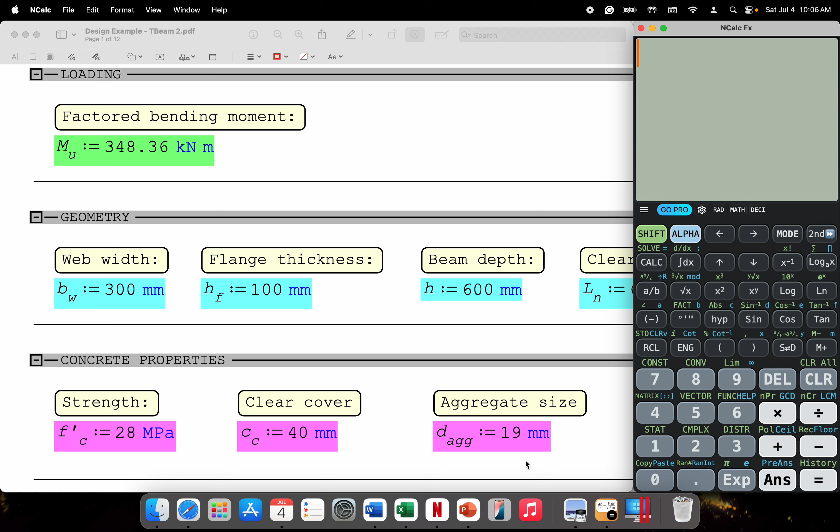So for this time, we're going to design a reinforced concrete T-beam. So we have here our design example.

Given the factored bending moment of 348.36, here's the geometry: the web width is 300 millimeters, the flange thickness is 100 millimeters, the beam depth is 600, the clear length is 6.10 meters, and the clear spacing of the beam webs is 3 meters.

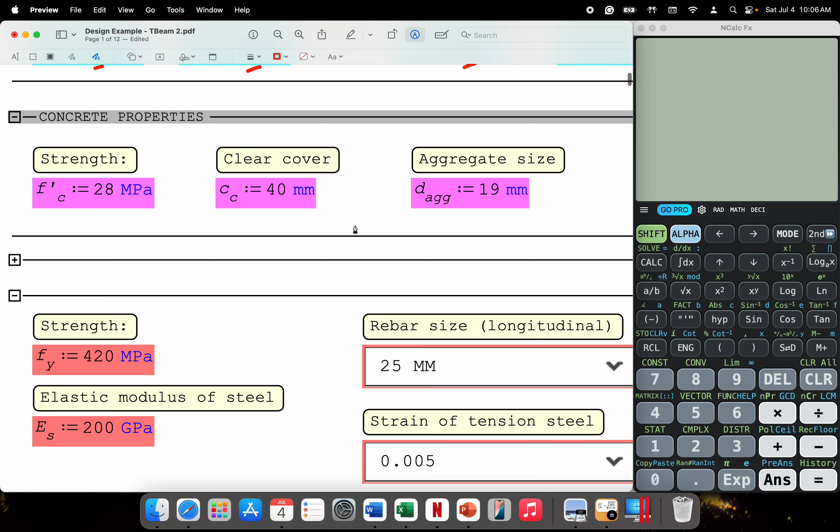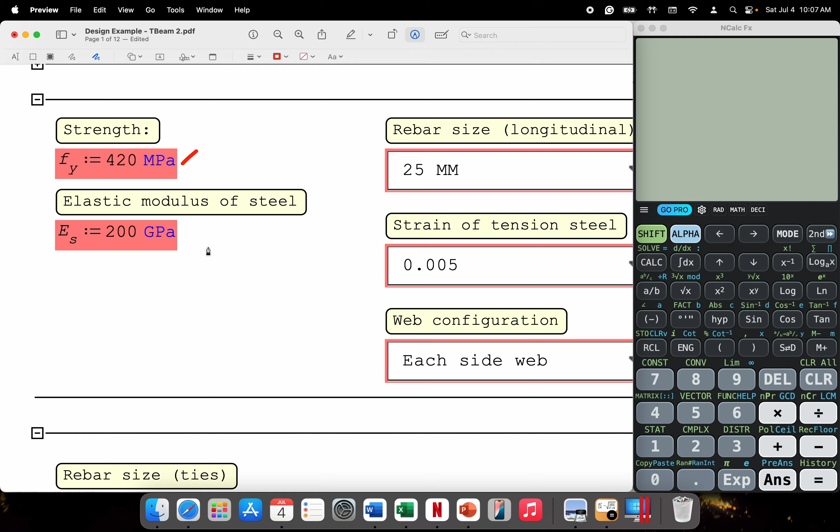Here are the concrete properties: FC prime is 28 megapascal, clear concrete cover is 40 millimeters, and aggregate size is 19 millimeters. For steel reinforcement properties, the yield strength is 420 megapascal, the elastic modulus of steel is 200 gigapascal, the rebar size for longitudinal bars is 25 millimeters diameter, and the strain of our tension steel is 0.005.

This is for design. For the assumed layer of rebars, we assume a single layer. The beam configuration is simply supported, and the web configuration has a web on each side.

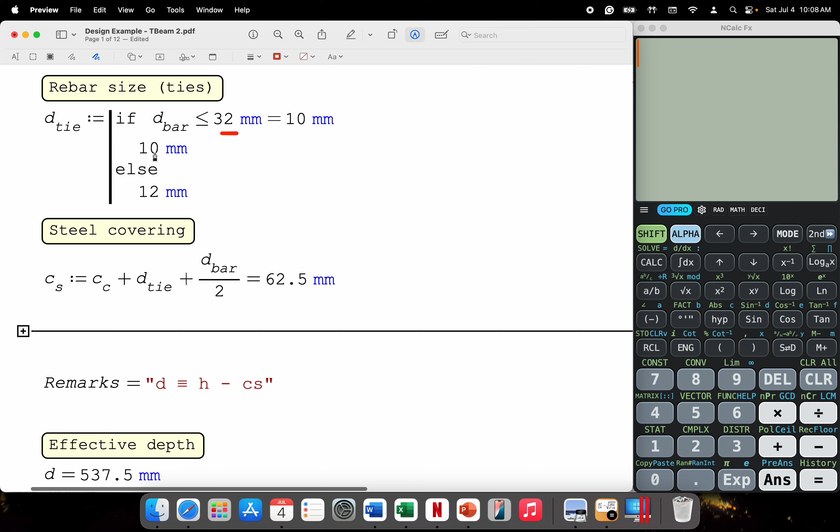So here's the design calculation. First, we have to determine the size of our stirrups. Since our bar diameter is 25 millimeters, which is less than 32 millimeters, the diameter of our stirrups is 10 millimeters. After that is the steel covering.

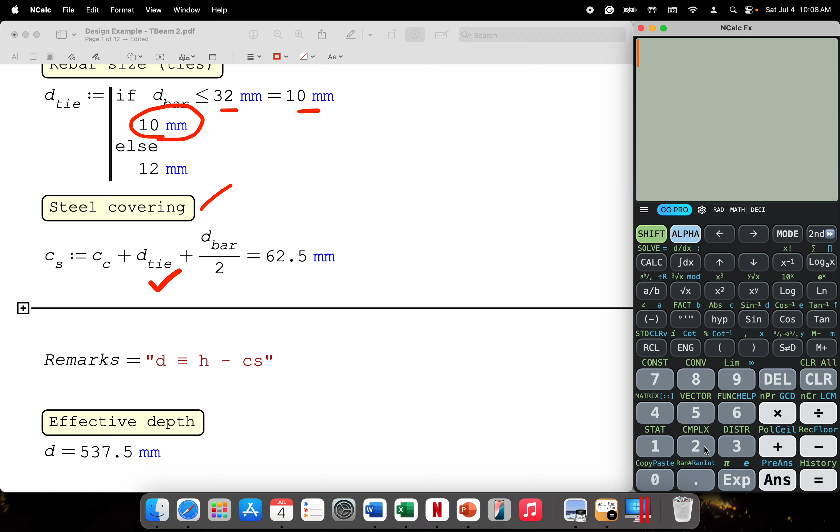Considering that we have a single layer of steel reinforcement, this is the equation to determine the steel covering: C sub C, the clear concrete cover, plus the diameter of ties which is 10, plus the bar diameter of 25 divided by 2. So we get a value of 62.5.

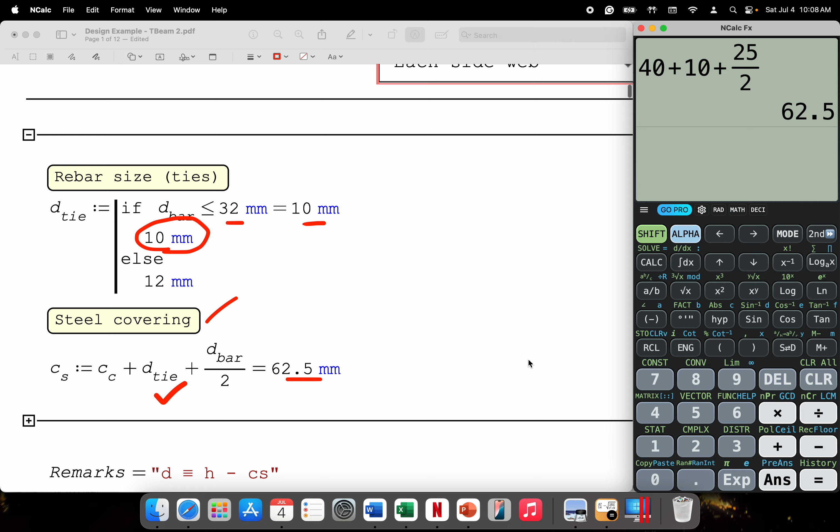After that, we determine the effective depth. Considering a single layer of steel reinforcement, it's just H minus the steel covering. Our H based on the problem is taken as 600, so we subtract the steel covering of 62.5.

So we get a value of 537.5. After this is the yield strain of our tension steel, which is just Fy over the elastic modulus of steel: 420 divided by 200,000, giving us 0.0021.

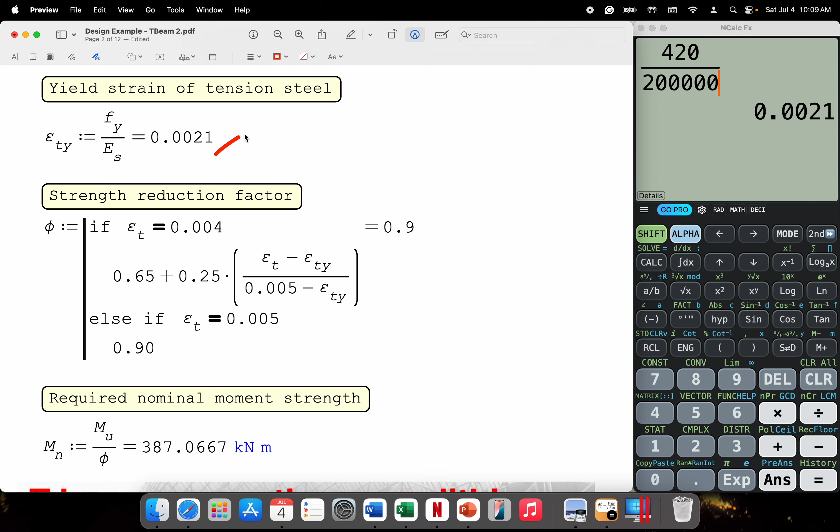After this is the strength reduction factor. Considering that the strain based on our given is 0.005, the strength reduction factor for designing our beam shall be taken as 0.9.

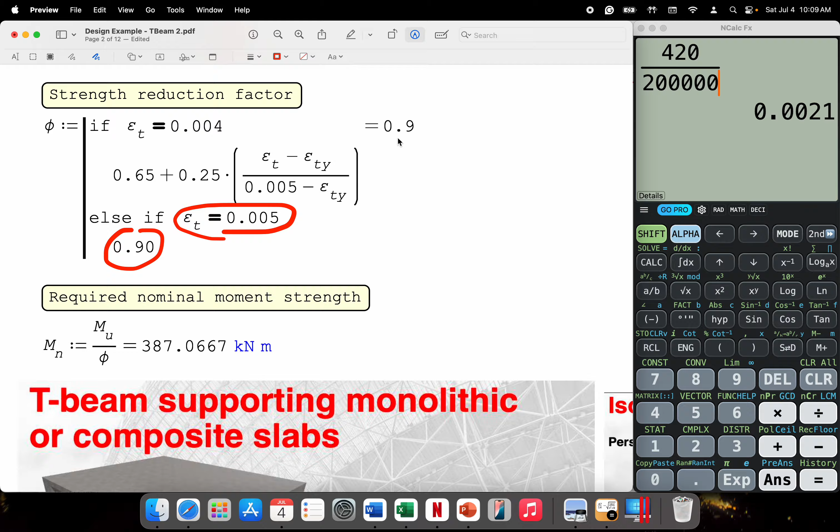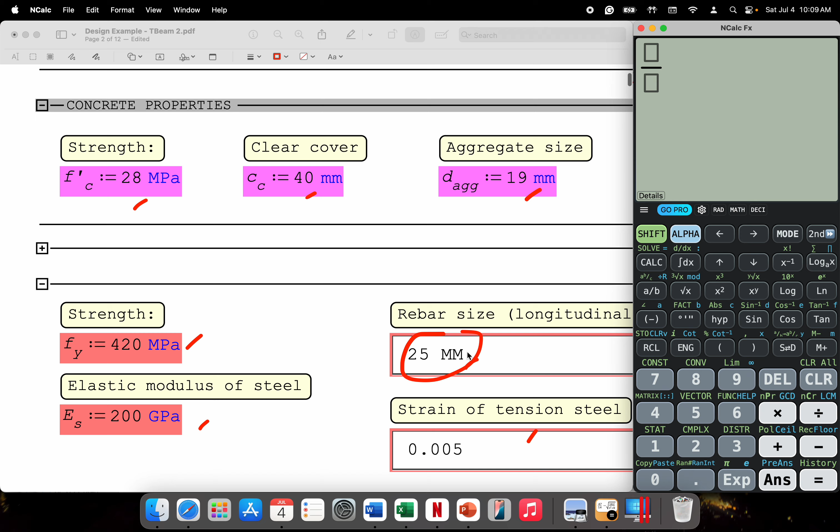After this is the required nominal moment strength. Since the factored moment is given, we just divide it by our phi of 0.9. So our factored moment is 348.36, divide this by 0.9, and we get 387.07.

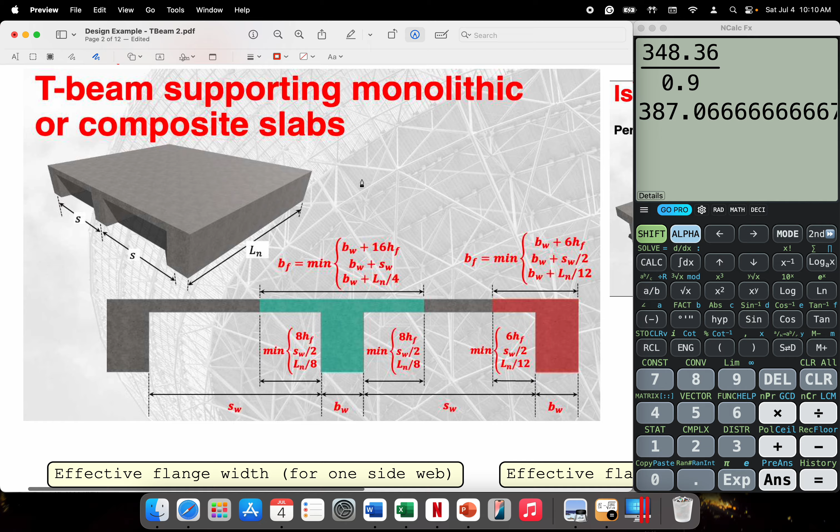So just a short lecture or review. Talking about T-beams, we have two types: the monolithic or composite slabs, where the T-beam supports a monolithic or composite slab as shown in this figure, and the isolated T-beam. For our design example here, we considered a T-beam supporting a monolithic or composite slab.

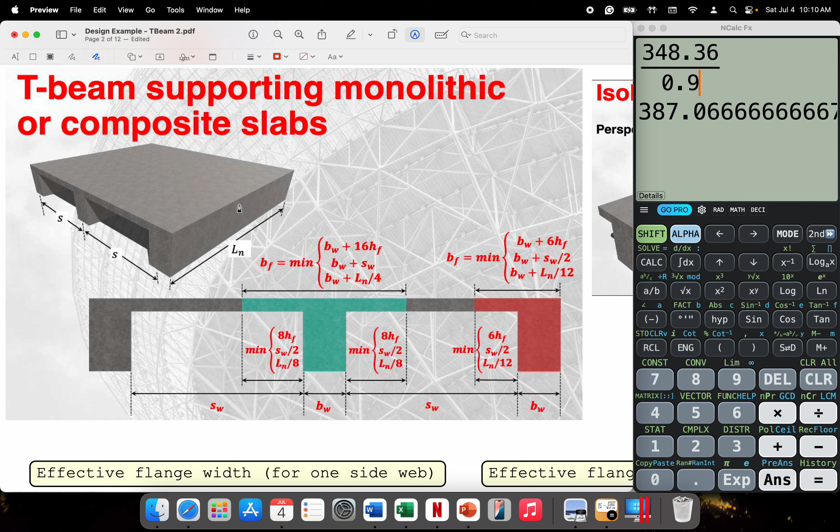This means the rectangular beam and the slabs are poured together, so we can analyze our beam here as a T-beam. It's also stated in the problem that there's a web on each side, so this is what we need to consider.

So first we need to determine is solving for our effective flange width. We have two cases: one web on one side, and two webs on both sides. If we consider one web on one side, this is the shape of our T-beam.

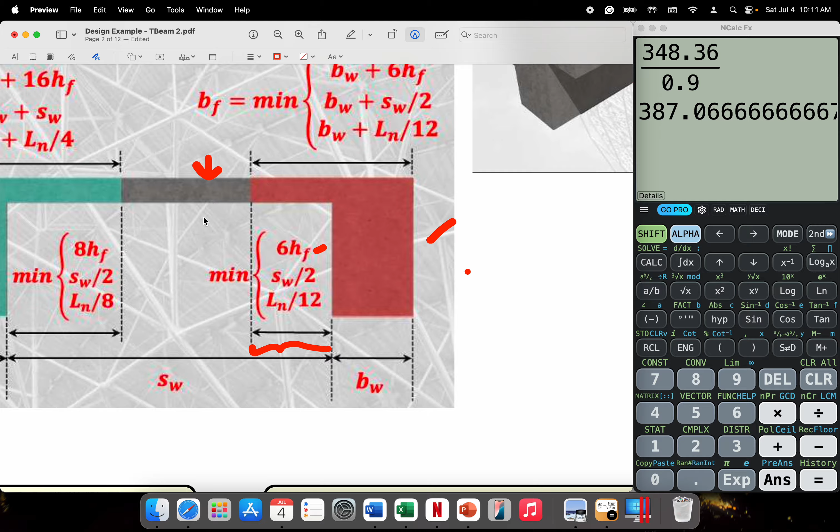Based on the NSCP, the clear dimension from the edge of our beam shall be taken as the minimum value among these three equations: 6 times HF, where HF is the thickness of our flange or slab, and SW all over 2, where SW is the clear dimension between the beam webs.

Okay, kung i-consider natin yung merong web on each side, ito naman yung ating equation. So yung dimension dito from the edge ng ating beam papunta dito, ito yung minimum ng tatlong equation: 8 times HF, SW all over 2, tsaka LN all over 8. So para makuha natin yung overall na dimension ng ating effective na

flange width, we're going to add yung BW tsaka 2 times ng dalawang mga clear dimensions dito. So meron tayong equation na BW plus 16 times HF, kasi yung 8 we multiply it by 2, naging 16. Next naman is BW plus SW, kasi SW all over 2 plus SW all over 2, that is taken to be SW. Then lastly, BW plus Ln all over 8 plus Ln all over 8, that is equivalent to Ln all over 4.

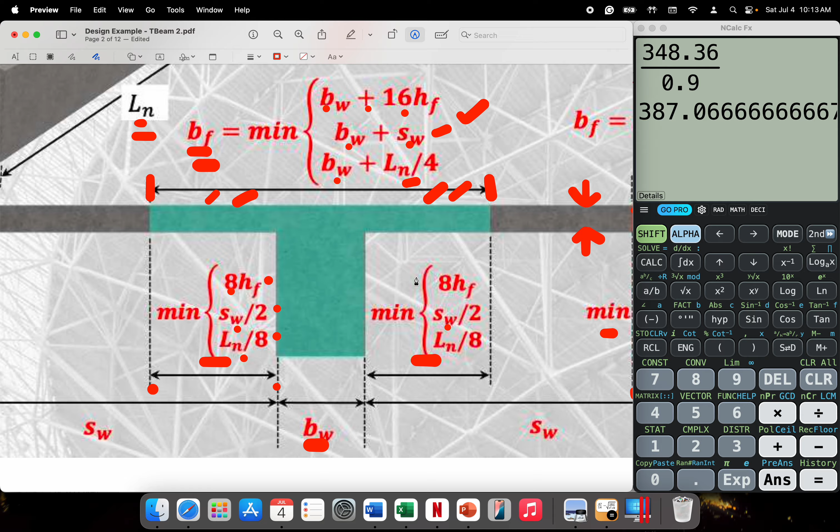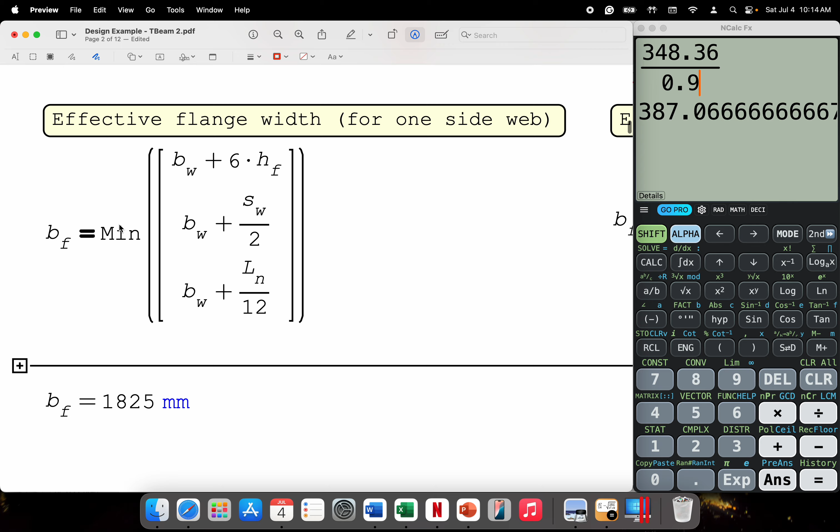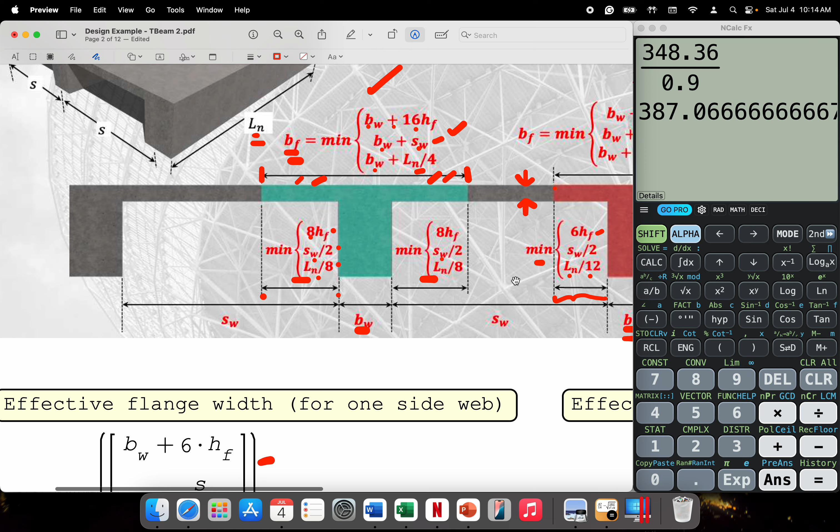So effective flange width for one side web, ito yung ating equation. This is the minimum among these three equations. However, na-state sa problem na yung condition is for each side web, meaning merong web dito sa kabila, tsaka merong web dito sa kabila. Meaning, itong shape na ito yung ating i-consider.

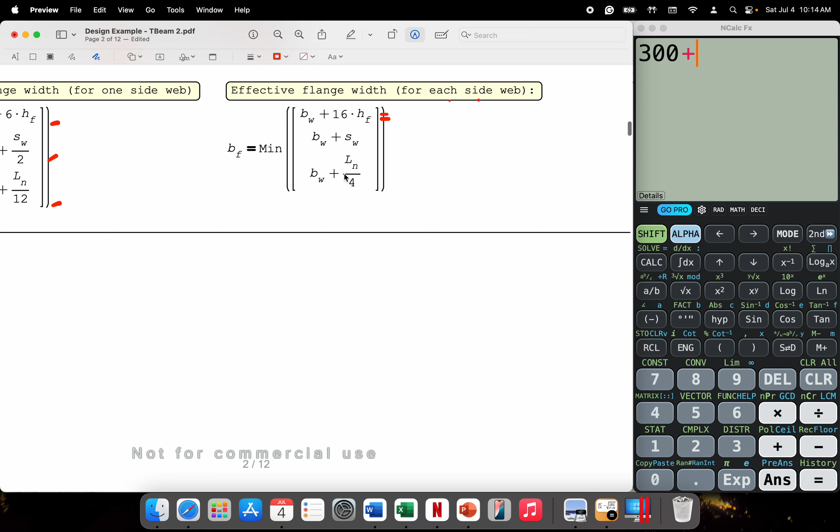So solve natin yung una equation: BW plus 16HF. Kung balikan natin, yung BW is taken to be 300 plus yung HF na 100, 16 times 100. So this is equivalent to 1,900.

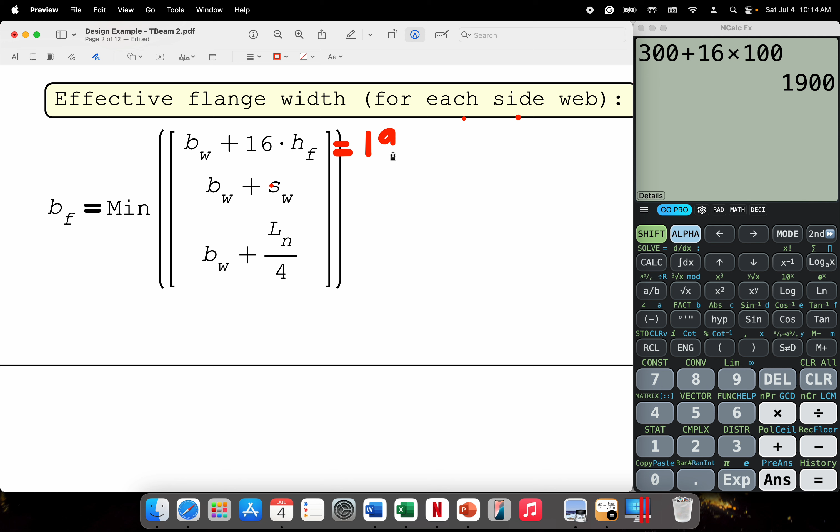Next naman is BW plus SW. Kung check natin yung SW, based sa problem, that is equivalent to 3 meters. But we still have to convert this to millimeters kasi naka-meter yung unit. So 3 times 1,000, we'll get 3,300.

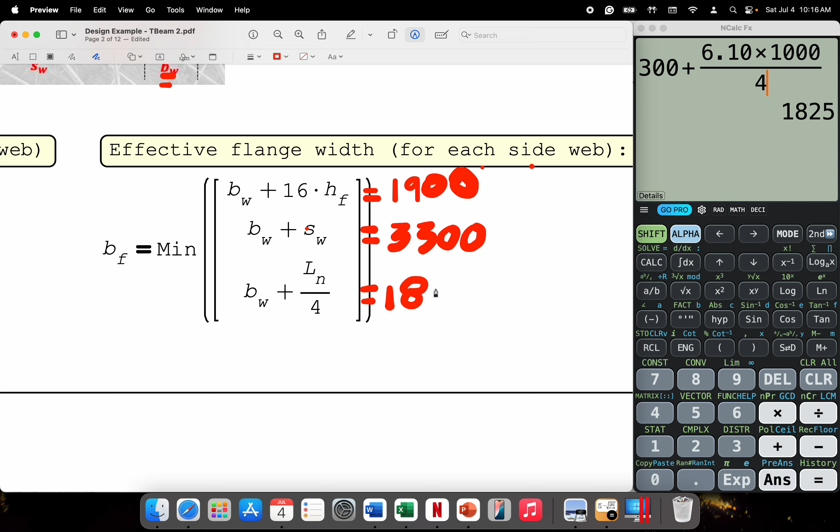Then lastly is BW plus LN all over 4. Yung LN based sa problem is 6.10, then mag-times lang tayo ng 1,000 para ma-convert sa millimeters. This is LN all over 4, so we have 1,825. So yung effective flange width natin na i-consider sa ating design is 1,825 millimeters.

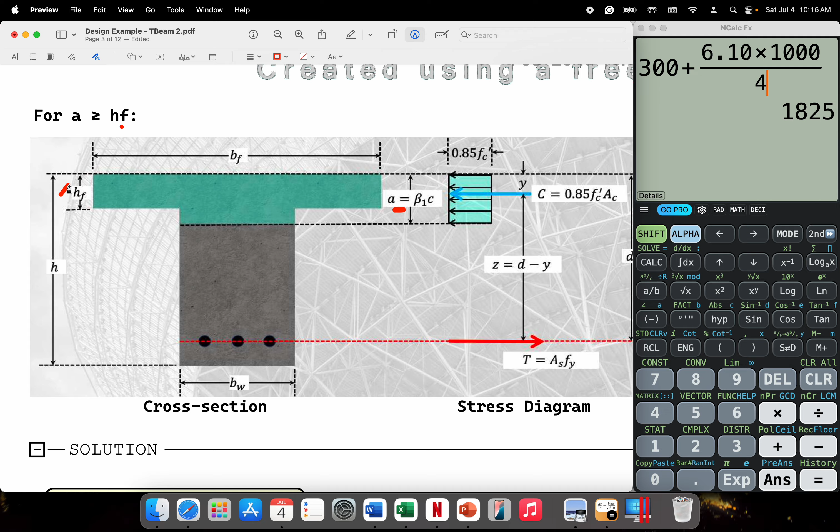Next na i-consider natin is we have to solve or analyze if yung A natin ay greater than or less than sa HF, or flange na depth na thickness. Kasi ito yung magiging cross-section natin sakali na yung A, ito yung A natin, ay lampas sa thickness ng ating flange. So in short, itong shaded na area dito, ito na ngayon yung magiging area ng ating concrete block.

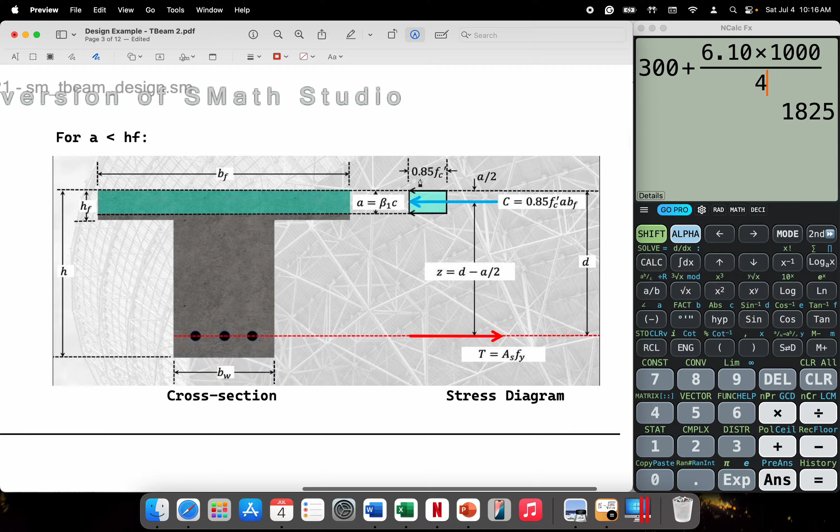Sakali naman na yung A natin is less than H sub F, ito naman yung magiging cross-section natin tsaka stress diagram. As you can see here, yung shaded na region dito, ito yung area ng ating compression block.

So for our solution, first and foremost, we have to determine muna yung trial na moment arm. Based dito, meron tayong mga suggested na equations para ma-determine yung moment arm. In short, we're going to conduct here an iterative na process hanggang sa makuha natin yung magiging value ng ating required na steel area. Yung Z dito, as you can see sa figure, this is the moment arm, or the distance between the tensile force ng steel reinforcement tsaka yung compressive force ng ating compression block stress.

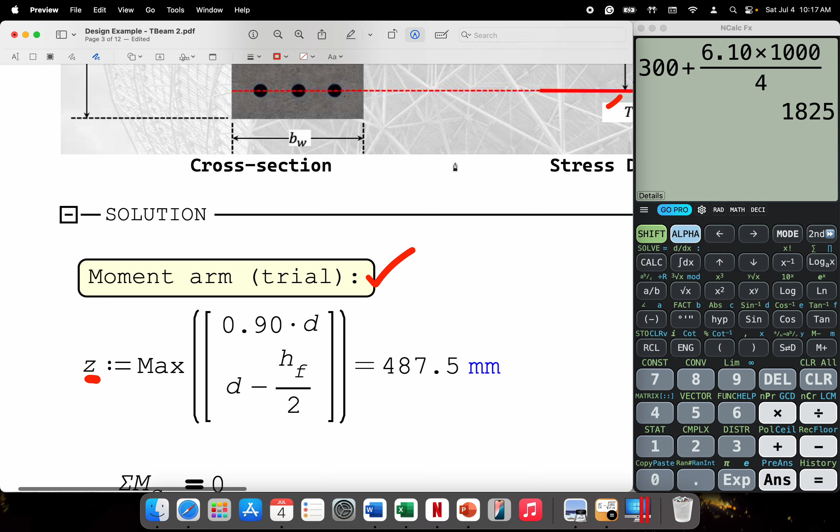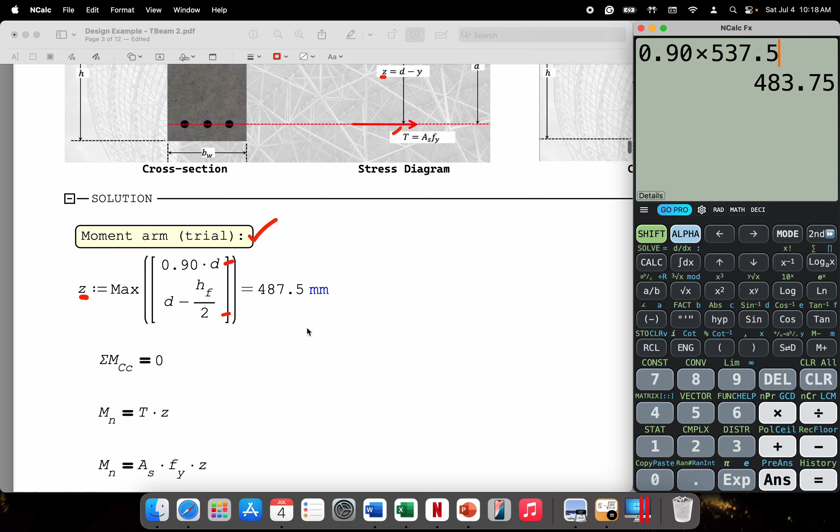So by trial and error, this is equivalent to the maximum value between these two equations. Kung i-solve natin yung 0.9 or 90% ng D, yung value ng D natin is effective depth, 537.5. This is equivalent to 483.75.

Then itong dalawang equation naman is D minus yung HF all over 2, 100 divided by 2, we have 487.5. So, state dito sa problem that the maximum value between these two equations ang mag-govern. So that's why yung 487.5 yung magiging trial na moment arm natin.

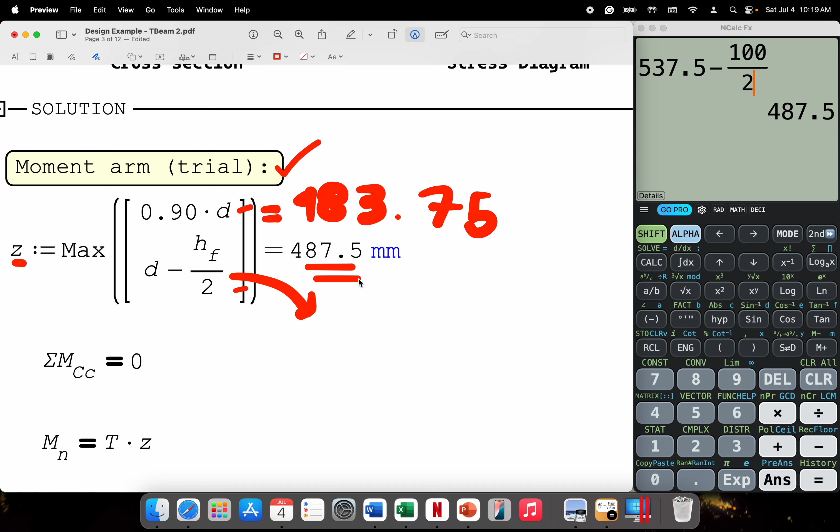After that, we're going to sum up our moment dito sa location or centroid ng ating compression block na force. So in short, dito tayo mag-moment, kung saan man yung magiging centroid ng ating area ng ating compression block.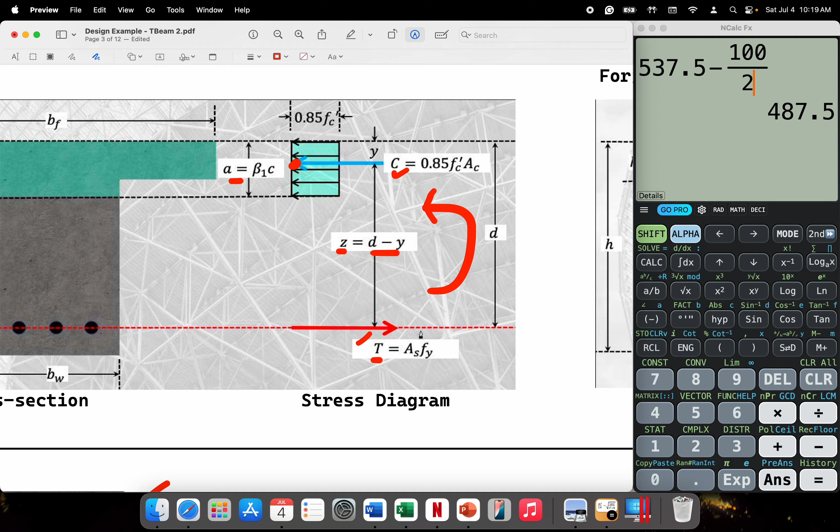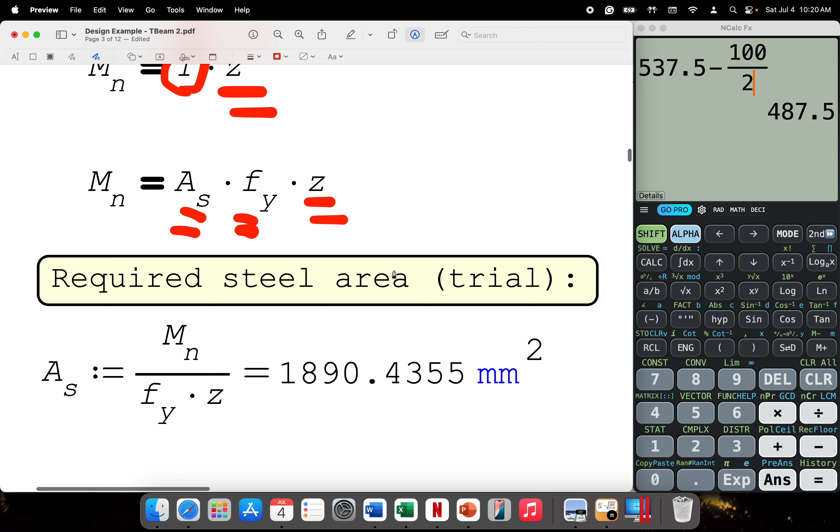So therefore, yung nominal moment natin, Mn, will now be equivalent to T times yung ating moment arm na D minus Y, Z. Yung T natin, if we're going to substitute the equation, that is equivalent to AS times yung ating Fy times yung ating moment arm na Z. After that, we're going to divide both sides of our equation here by Fyz para makalkula natin yung required na steel area, yung trial na required steel area.

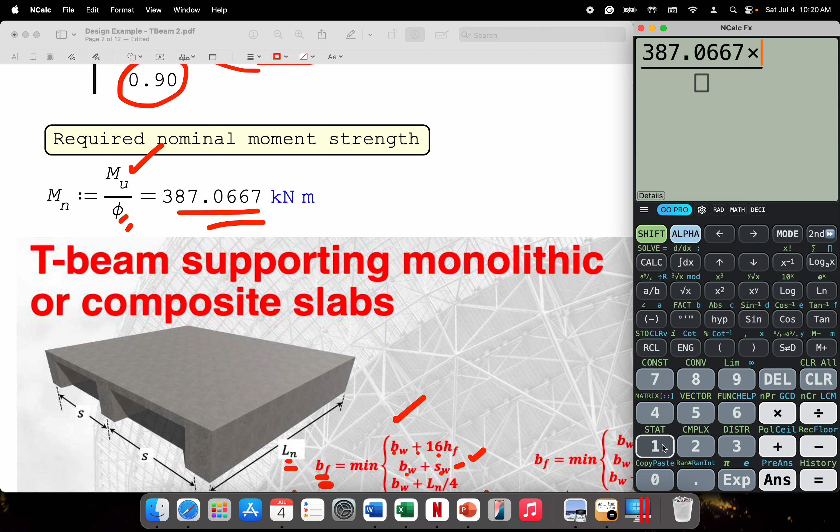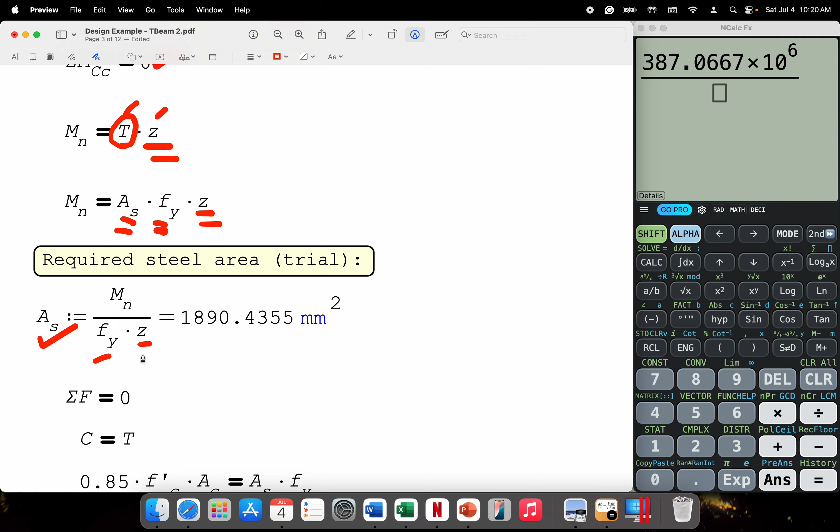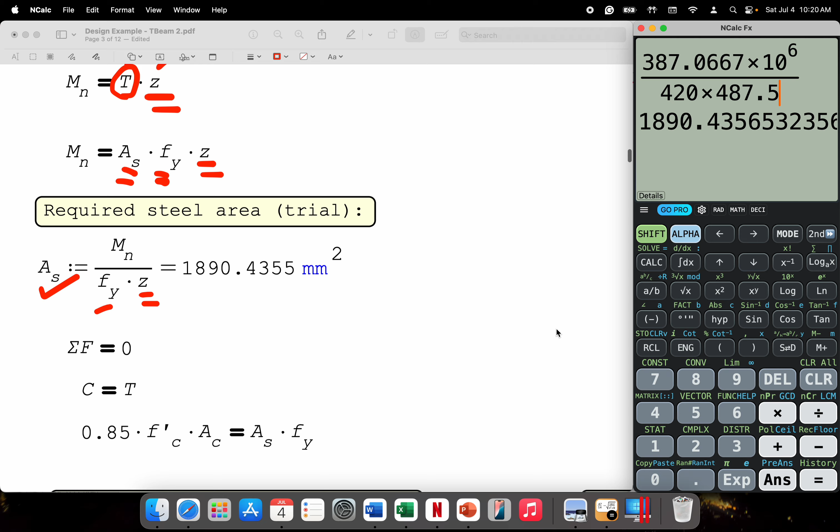So yung ating nominal moment na na-solve kanina is equivalent to 387.0667. Mag-times 10 tayo to the power of 6 para ma-convert ito sa Newton times millimeter. Then we're going to divide this by Fy times yung trial na moment arm na Z. Yung Fy natin, if I'm not mistaken, that is 420, times yung Z, yung trial na moment arm na 487.5. So yung makalkula natin is 1,890.4355.

After that, we're going to sum up our forces to be equivalent to 0, such that yung C will now be equivalent to T. We're going to base it here sa ating diagram. If we're going to sum up our forces, yung tensile force T natin will be equivalent to compressive force ng ating compression block stress na C. So therefore, AS times Fy will now be equivalent to 0.85 Fc prime times yung area ng ating compression block.

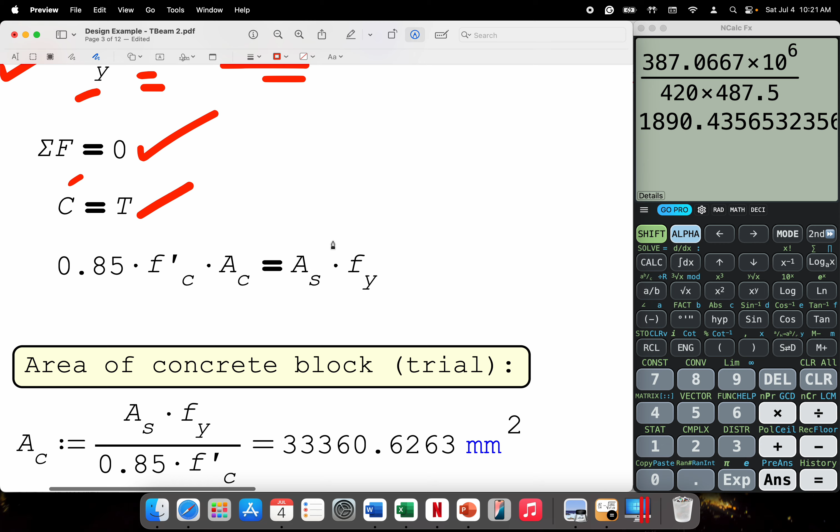So AS times Fy is equivalent to 0.85 Fc prime times AC. If we divide both sides of our equation by 0.85 Fc prime, the trial area of our concrete block will now be equivalent to AS times Fy all over 0.85 times our Fc prime.

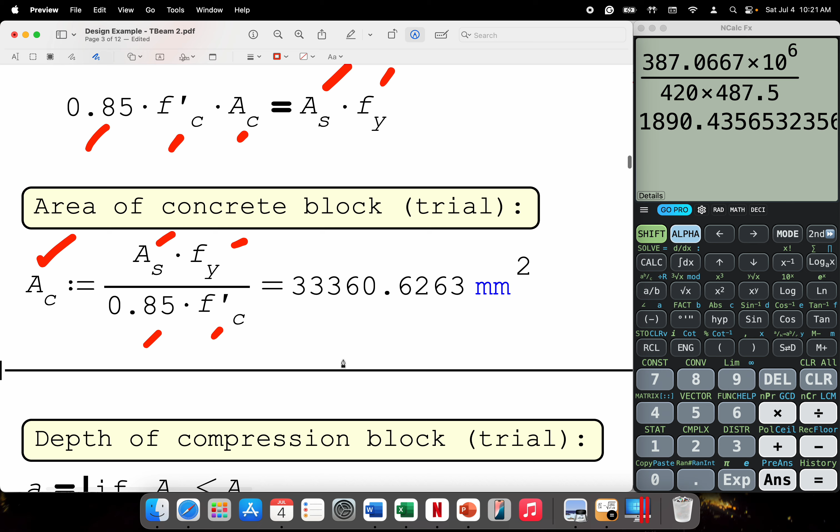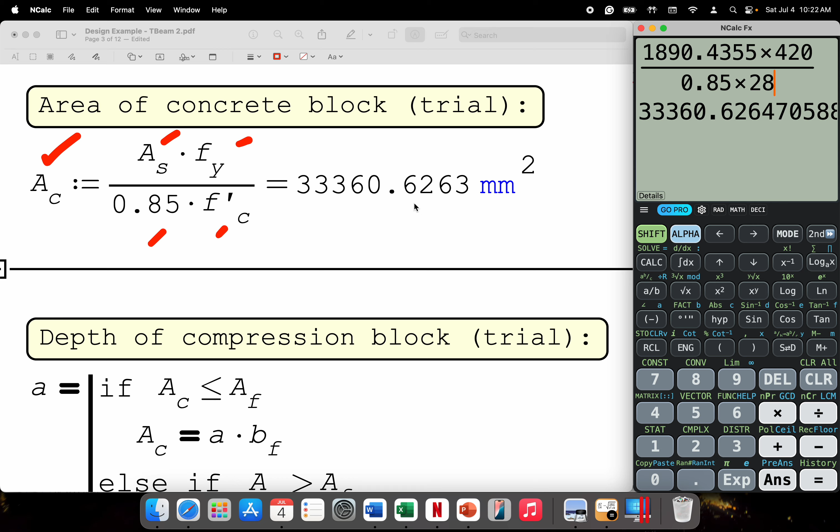So the AS is equivalent to 1890.4355 times the Fy of 420, divided by 0.85 times our Fc prime of 28, we will get 33,360.6263 square millimeters.

Since we already have the area of our compression block, let's compare it to the area of our flange. So the area of the flange referred to here is this. Again, the area of the compression block, the A sub C, is this shaded region, for example. Let's compare it to the area of our flange, which is equivalent to BF times our HF.

So in case our A sub C exceeds the area of our flange, meaning this shaded region will be the area of our compression block if we visualize it, meaning our A is greater than our HF.

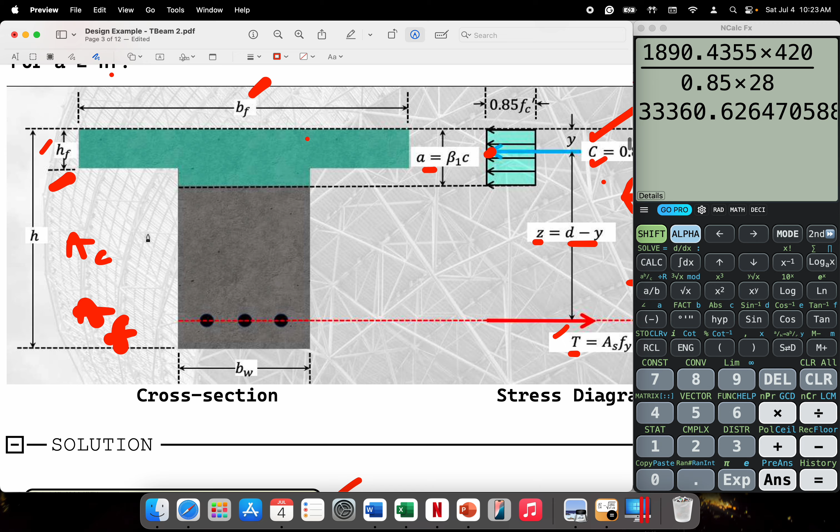But if the area of our compression block, the A sub C, is less than the area of our flange, this illustration will be the result, meaning the A is less than our HF.

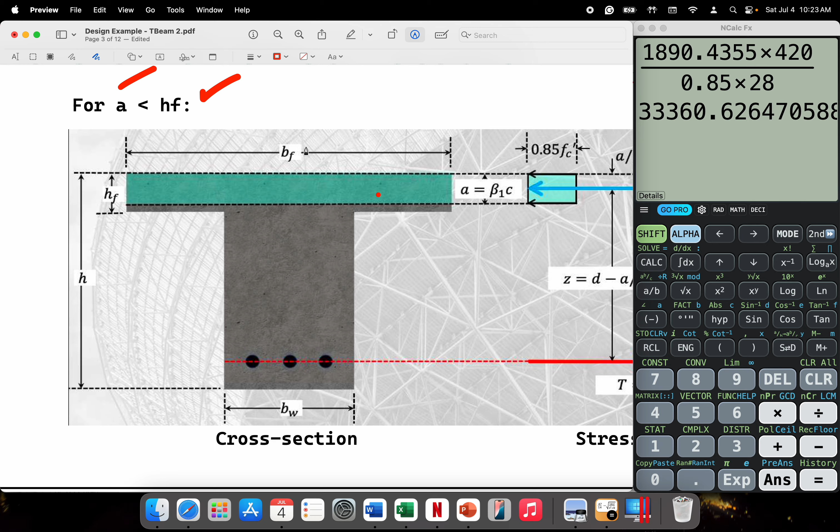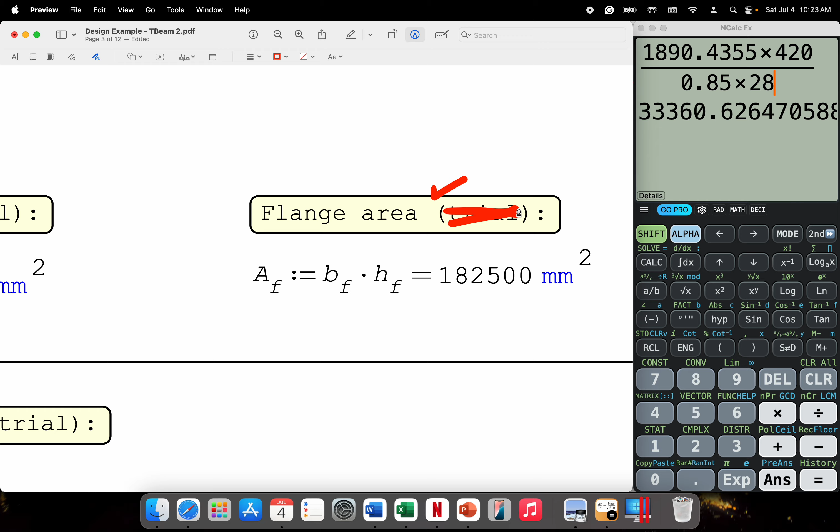So if we're going to compare, let's first solve the area of our flange. This is not trial, by the way. Our flange area is BF times HF.

So the BF we solved earlier is equivalent to 1825 times the HF of 100, so we'll get 182,500.

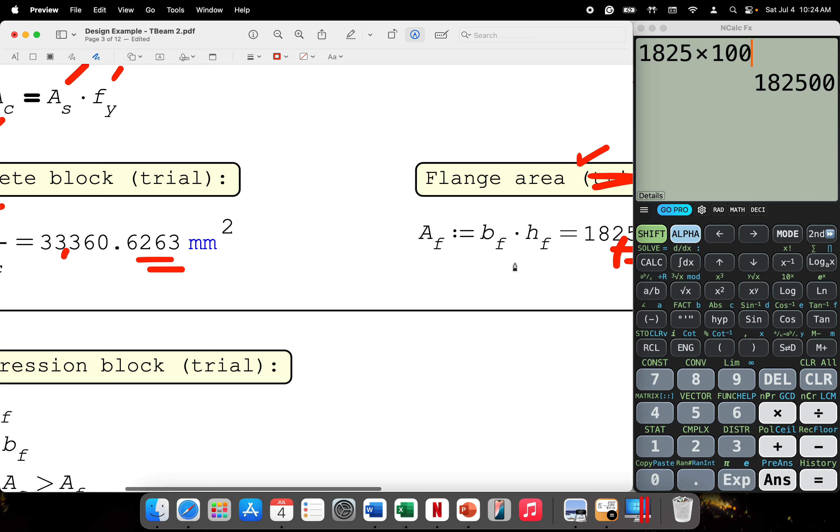Since the area of our compression block is 33,000, it is actually less than our flange area of 182,500. So therefore, this illustration is what we will use, meaning the A is less than the thickness of our flange.

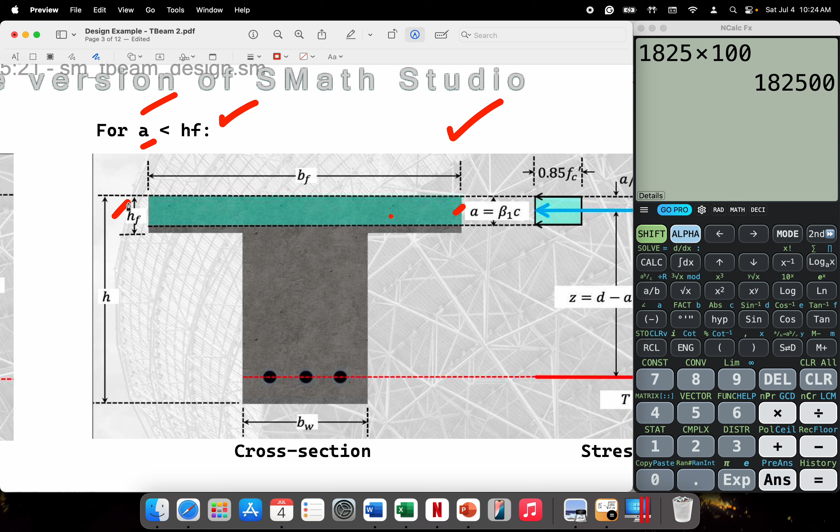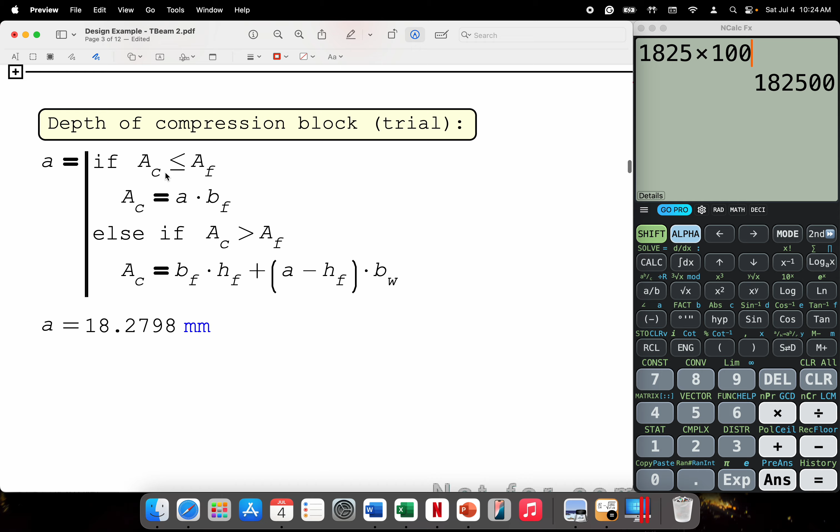So for the depth of our compression block, the trial, since our AC is less than our AF, therefore the area of our compression block will just be equivalent to A times our BF. So we'll use this equation to solve for our A.

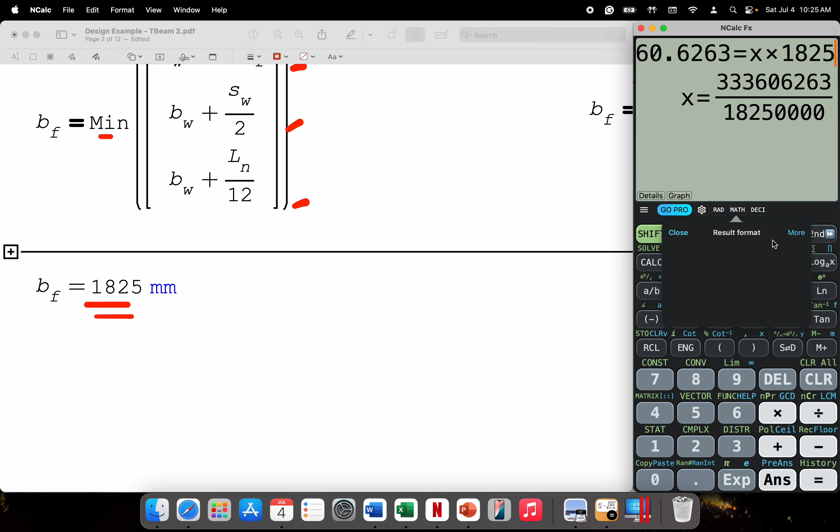So our A sub C is 33,360.6263. This is equivalent to our A times our B sub F of 1,825. So the value we can solve is 18.2798.

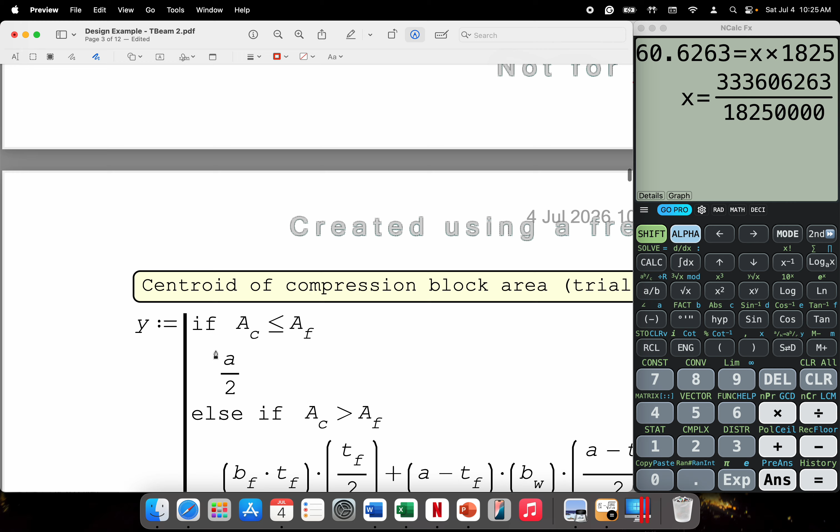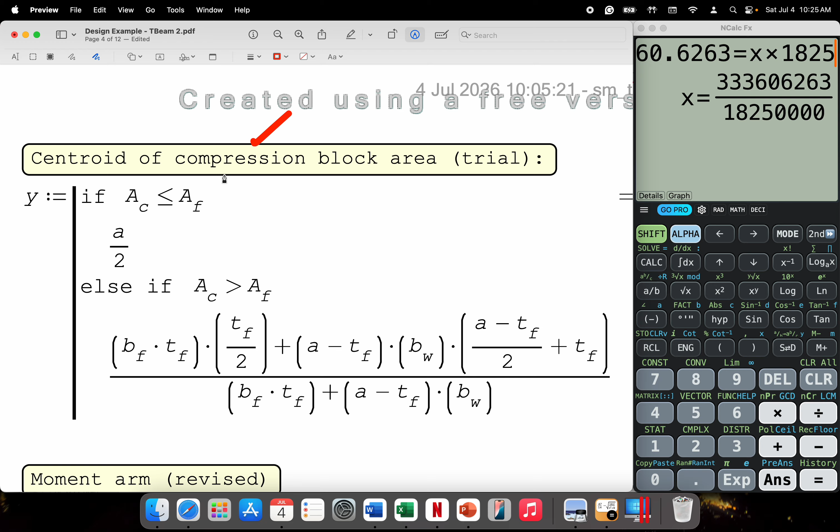Since we already have A, we can now also solve the other properties. So first, the next step is solving for the centroid of our compression block area, going to the extreme fiber of our concrete on the compression side. So this is the trial area.

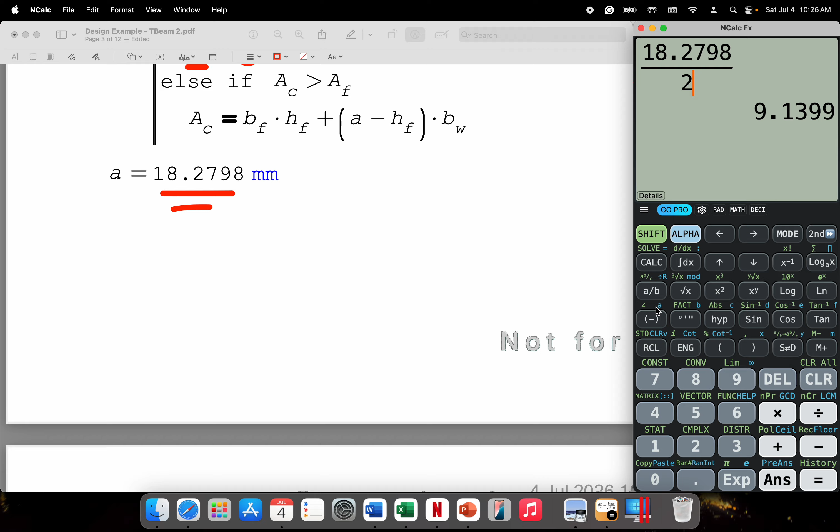Since our A sub C is less than our A sub F, we're going to make use of this equation, A all over 2. So we have 18.2798, divide it by 2, we'll get 9.1399.

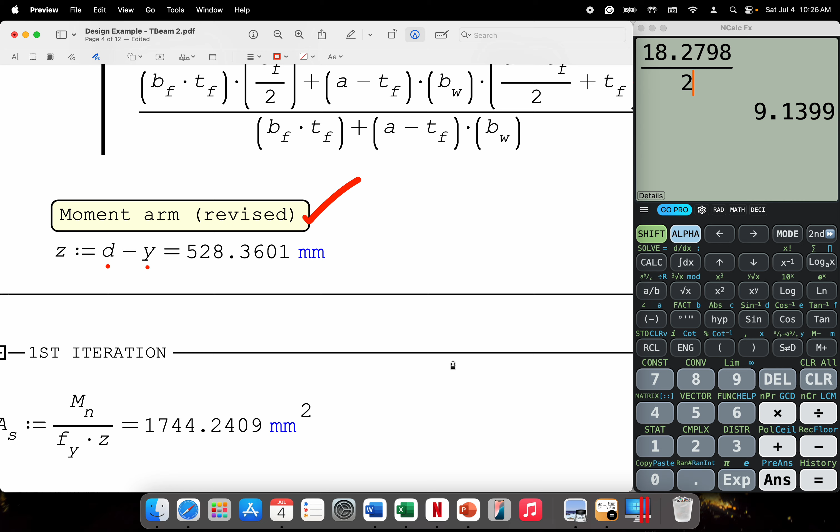Since we now have y, we can solve our moment arm. So the revised moment arm will now be d minus y. If we check the value of d earlier, or effective depth, our d is 537.5.

537.5 minus our y of 9.1399, so we have here 528.3601.

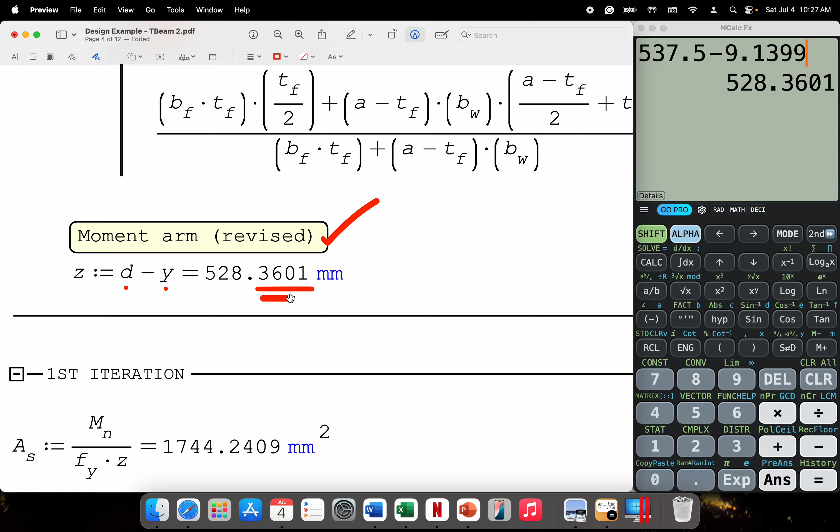So since we have a new value of z, we are going to repeat the procedure again to solve for our required steel area.

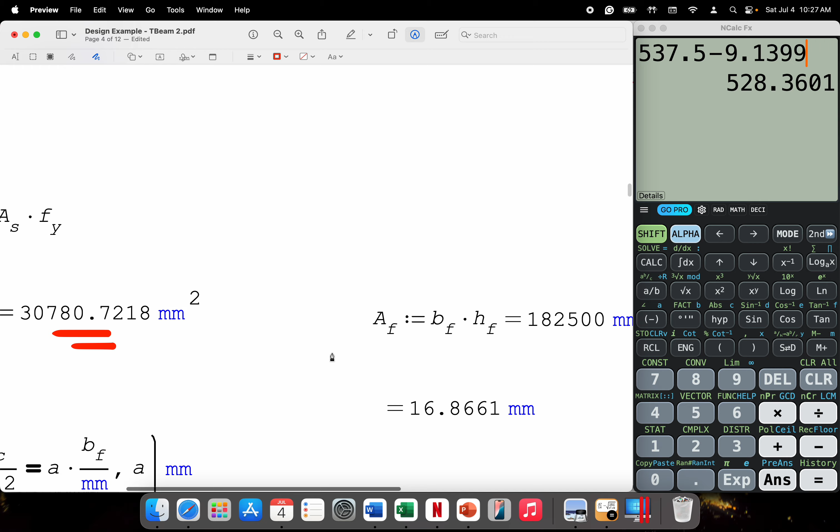Then after that, solve again the A sub C, then compare again to A sub F, and then calculate again your A. Once you have A, solve again the y by comparing A sub C and A sub F. Once you have solved y again, repeat the process to solve z. Once you have z, you have to perform the second iteration.

So yung goal dito dapat ano, yung value ng inyong steel area sa current na iteration, yung 2 decimals niya dapat maging the same doon sa previous na iteration ninyo. If that will be the case, pwede na kayong mag-stop ng iterative na process.

So in here, it took me about 3, 4 iterations. Kasi as you can see here, dito sa ating ika-fourth na iteration, ito na ngayon yung value ng ating required na steel area, 1741.87. Kung i-compare natin to sa previous na iteration, 1741.87. So same na yung kanilang 2 decimals. So pwede na kayong mag-stop ng iterative na process. Hanggang fourth iteration na lang kayo.

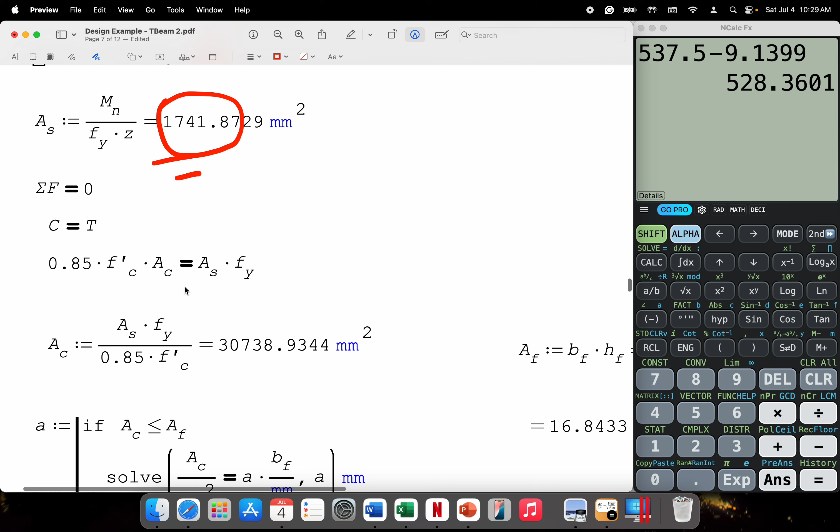So from here, kung solve nyo ulit yung A sub C, is now equivalent to 30,738.9344. Compare nyo sa A sub F. So less than pa rin yung A sub C. So therefore, yung AC will just be equivalent to A times BF. Yung masasolve ninyo na value ng A dito is itong 16.8433.

So after nito, is to solve again for your Y. Since may A na kayo na 16.8433, you divide it by 2, you'll get 8.4216 millimeters. So from here, ito na ngayon yung magiging final ninyo na moment arm, D minus Y for your Z.

So after that, ko-compare nyo na ngayon yung steel area sa minimum na steel area. So the maximum value between these two equations here, yun yung mag-govern.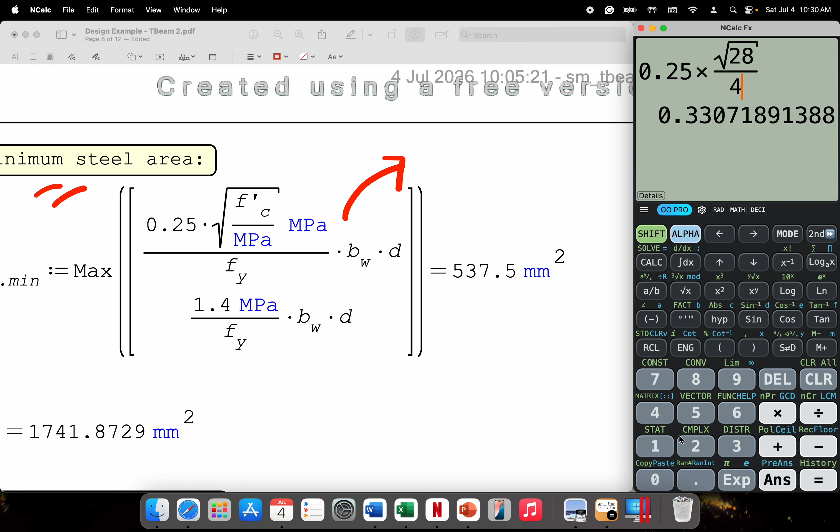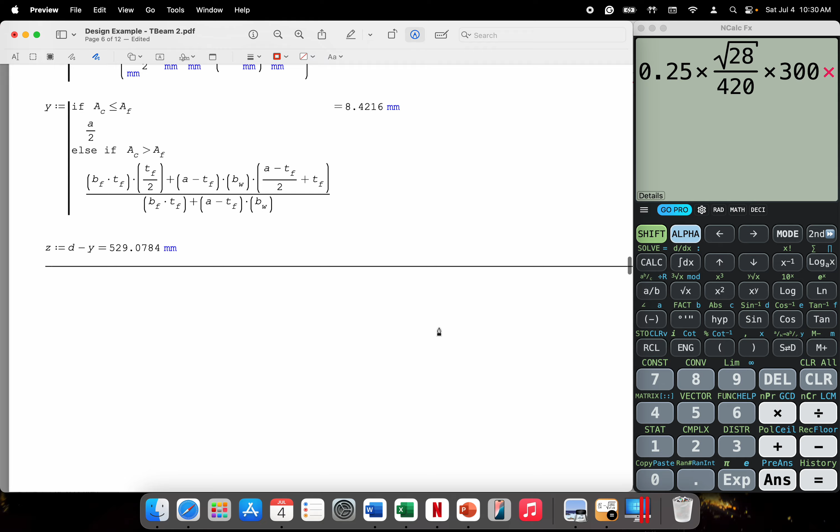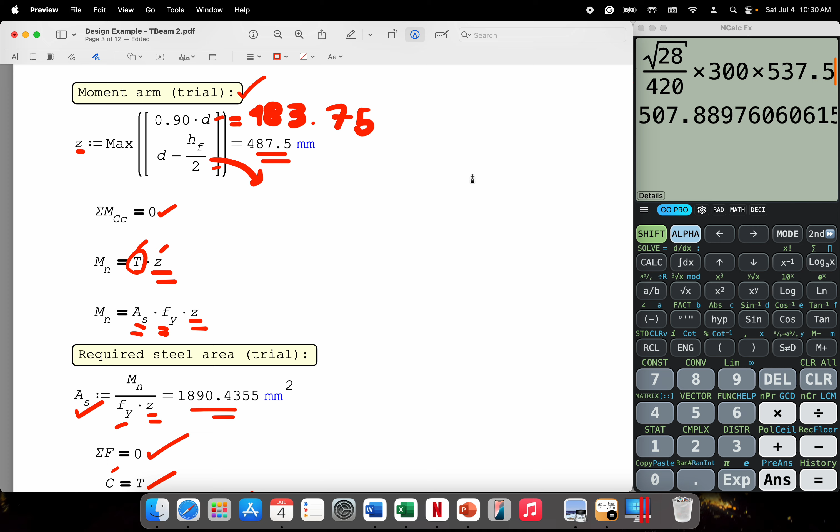So kung isa-solve natin, we have 0.25 times yung FC prime natin, which is 28, over Fy na 420, times yung width na 300, times yung D, 537.5. We'll get 507.89.

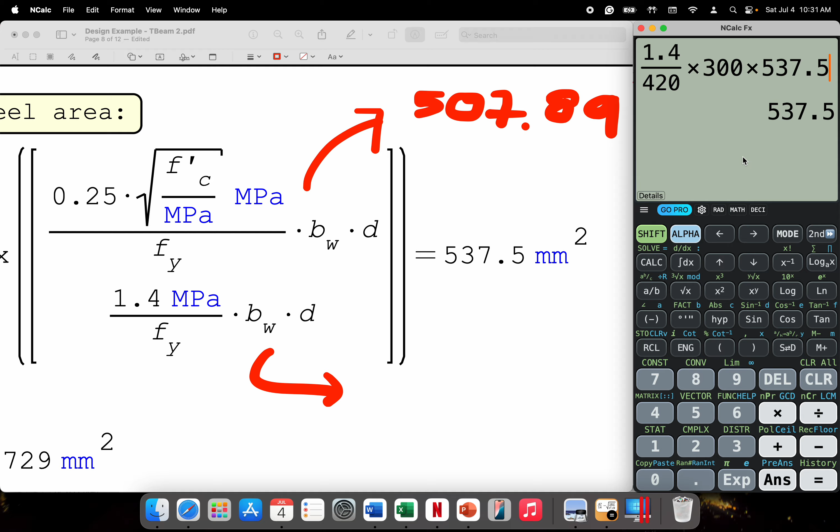Then second equation naman is 1.4 divided by Fy, 420 times 300 times 537.5. So we'll get 537.5. So yung maximum value is 537.5. So that is the reason why yan yung nag-govern.

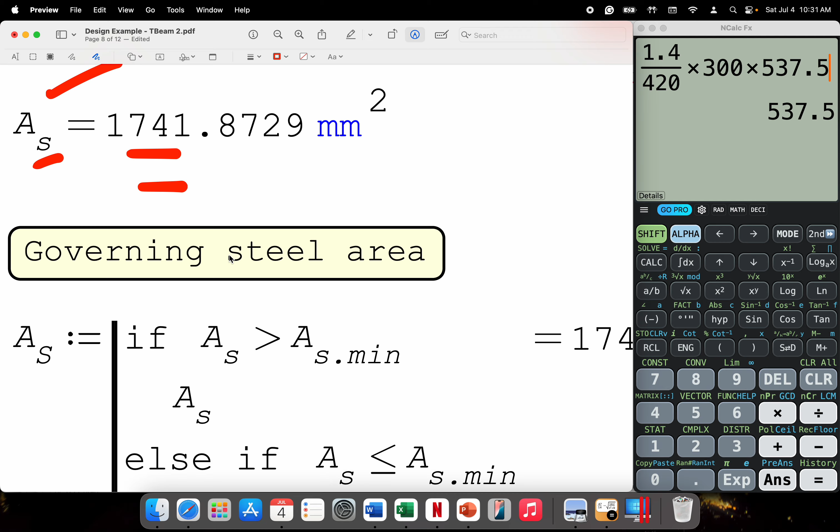So after that, we're going to compare it doon sa na-solve natin from our iterative na process, yung required na steel area, 1741. Since yung 1741, yung AS natin is greater siya sa ating AS minimum, therefore, ito na ngayon yung mag-govern na steel area natin para makalculate natin yung ating number of bars.

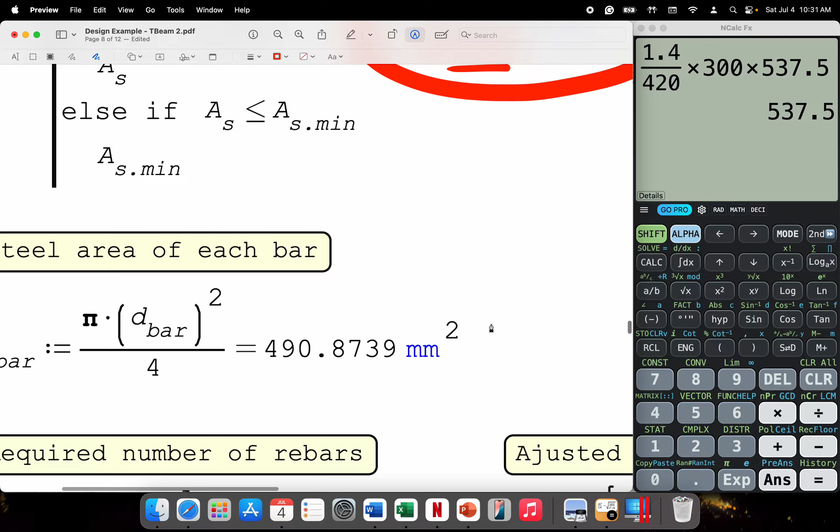So after that is to solve for the steel area of each bar. So pi times 25 squared all over 4 will get 490.8739. After that is to calculate the required number of rebars.

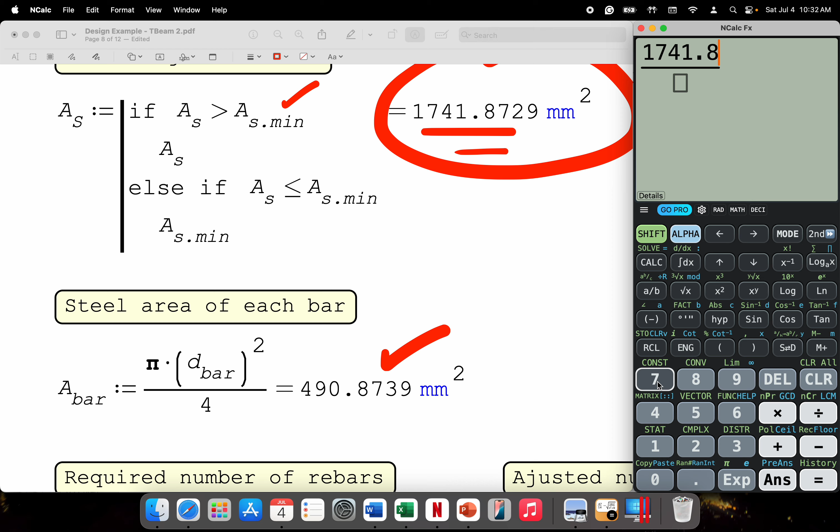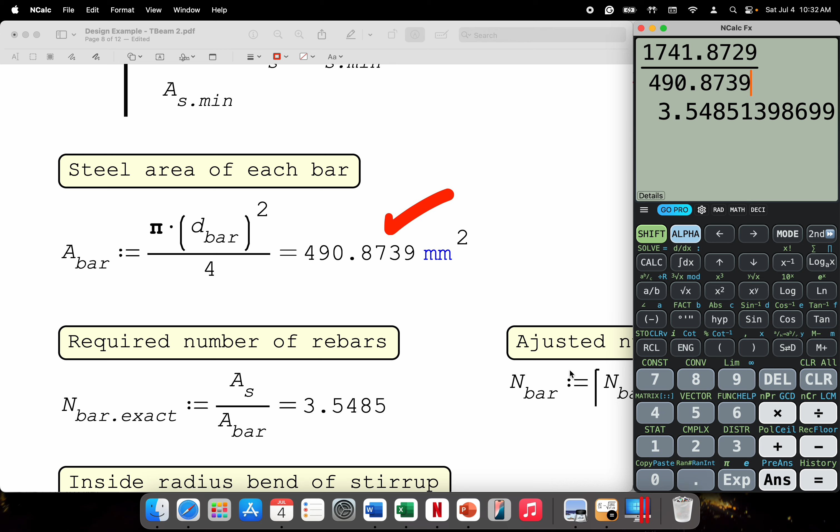1741.8729, i-divide na lang natin ito sa ating area ng bar na 490.8739. So yung makalculate is 3.5485. And then yung adjusted na number of bars natin for single layer is 4 bars.

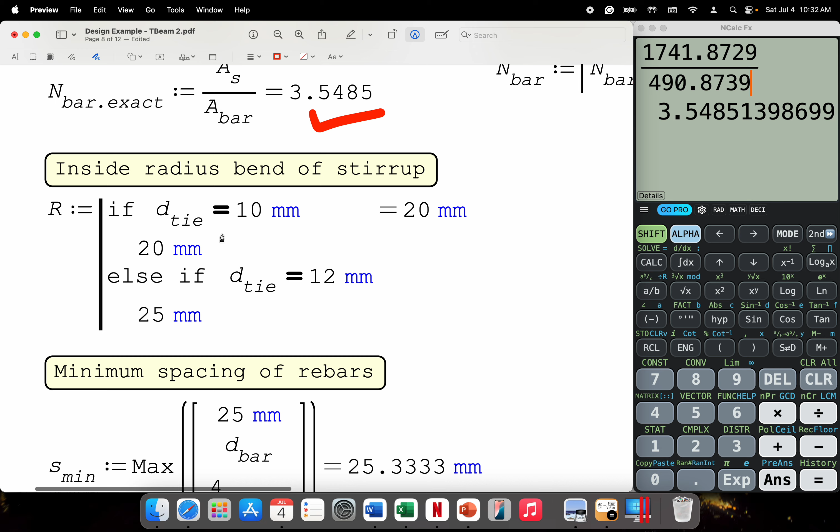After that, we're going to solve for the clear spacing. So first, solve muna natin yung inside radius na bend ng ating stirrup. Since yung diameter ng tie natin is 10 millimeters, therefore 20 yung magiging value ng R.

After that is to solve for the minimum spacing ng rebar. So we have 25, bar diameter natin, 25 pa rin. Then 4/3 ng diameter ng aggregate, 4/3 times yung diameter ng aggregate natin na 19, which is 25.333.

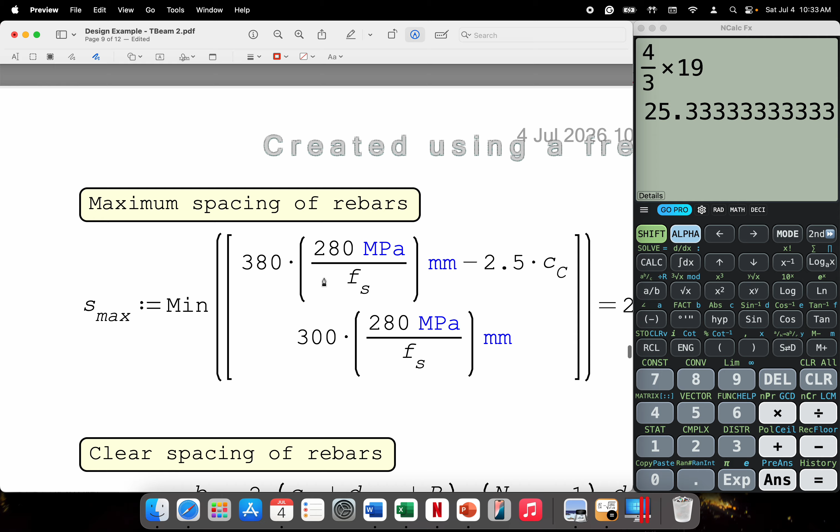So the maximum value among these three equations, yun yung mag-govern na minimum. We can also solve then for the maximum na spacing, but I'm going to skip it na lang because I'm just going to compare it na lang with the minimum na clear spacing.

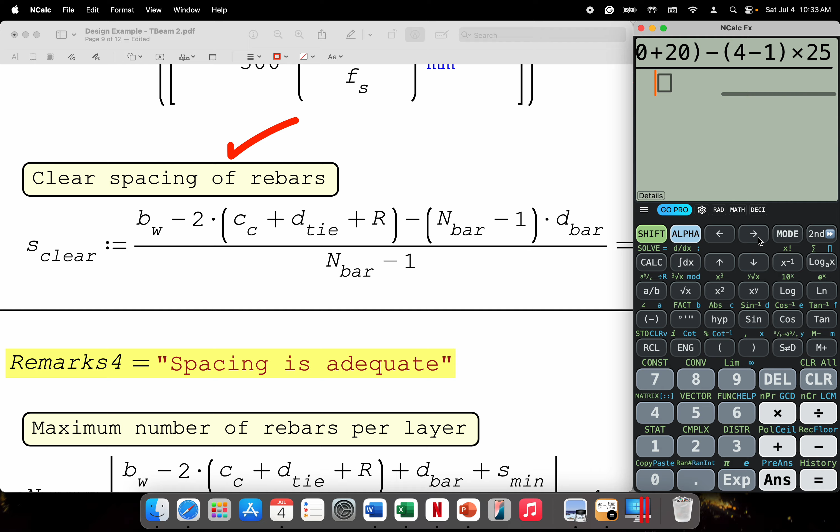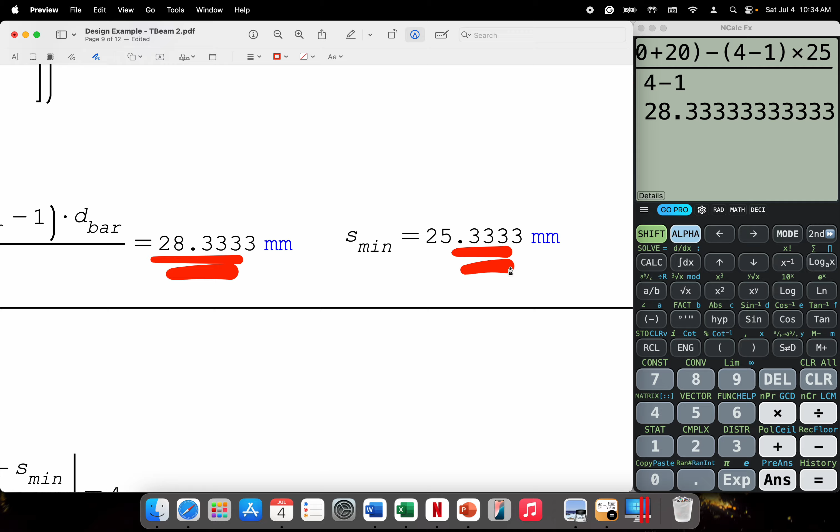So the clear spacing natin, ito na. So we have yung width ng web natin na 300 minus 2 times clear concrete cover na 40 plus diameter ng stirrups na 10 plus yung inside radius natin na 20, minus yung number of bars is 4 minus 1, times yung diameter ng bar natin na 25 all over 4 minus 1. So we'll get a value of 28.333. Since this is greater than our minimum spacing na 25, therefore, yung spacing natin is adequate.

So after that, pwede na natin ma-finalize na yun yung ating T-beam. So ito na yung ating T-beam.

So yung B sub F is dito hanggang dito. So yung B sub F natin, yung value nito is 1,825 millimeters. Next naman is yung flange na thickness na 100, dito hanggang dito. Ito yung H sub F.

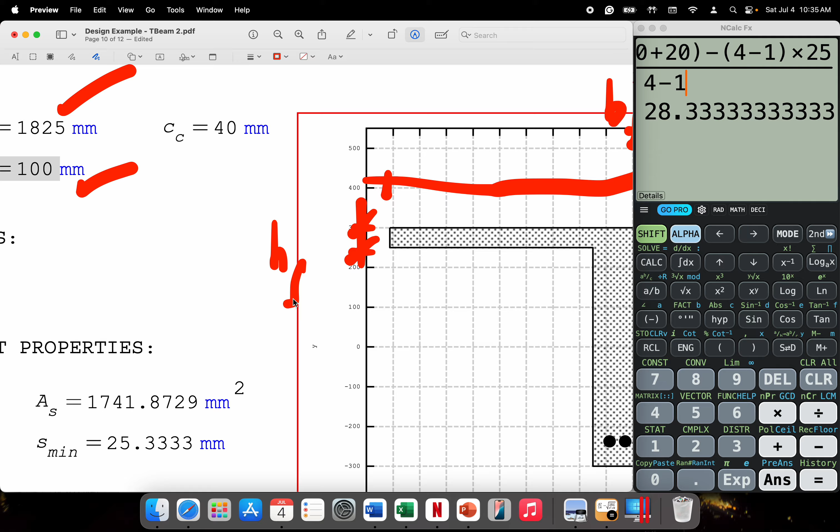Then we have our H na 600, dito naman hanggang dito. Ito yung H. Then lastly is yung BW na 300, dito hanggang dito. Ito yung BW.

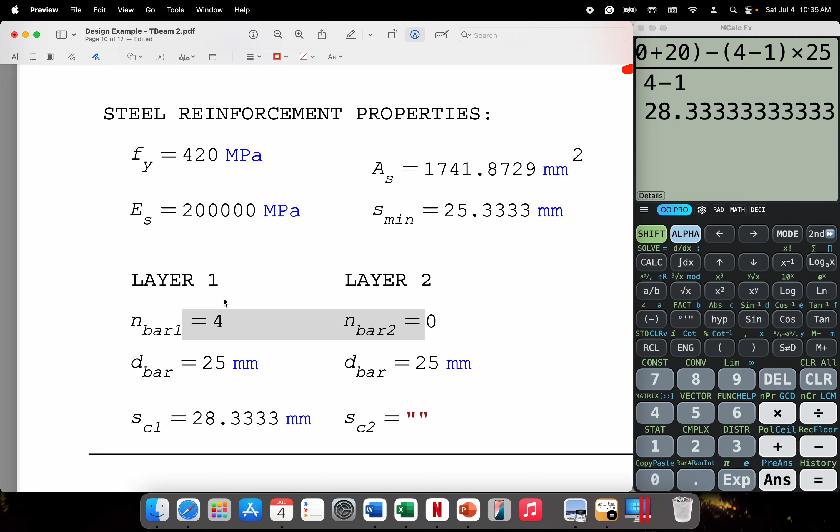And sa number of rebars, meron tayong 4 na 25 millimeters, tsaka yung clear spacing is 28.333. So wala na tayong second layer. So that ends our design of T-beam.

Then yung next naman natin na i-discuss is yung investigation for which yung na-design natin na T-beam, we're going to investigate or determine yung strength capacity, yung phi-mn. Then we're going to compare it with the factored moment if safe ba for flexure or hindi yung na-design natin na beam.